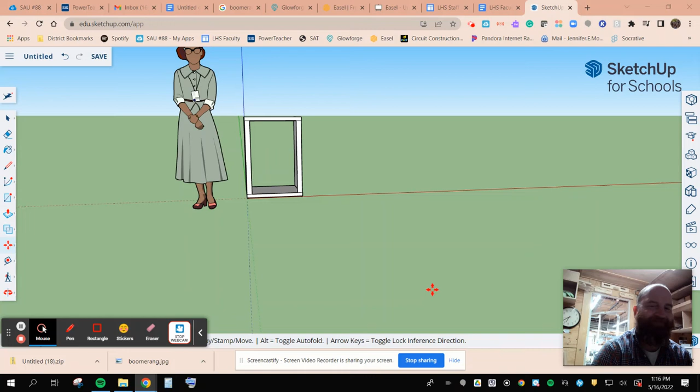What we're going to make today is just this really simple cabinet right here. But it's important that you know how cabinets are made, so we're going to learn how to do this in SketchUp.

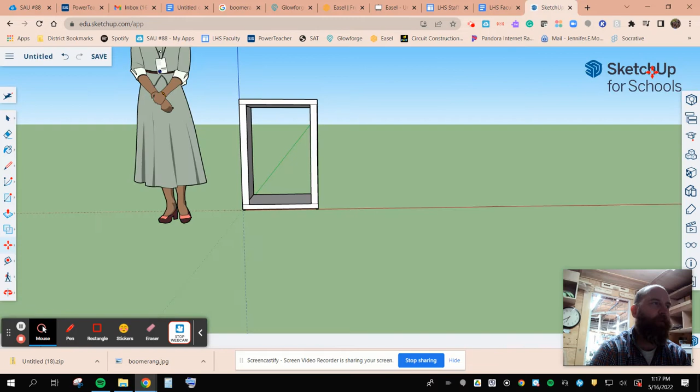I'm going to come out of here. I'll just go home. Can I just go home? I'm just going to go home. I'm going to click Don't Save because we're going to do it all together from the beginning.

So you know how to log on to SketchUp at this point. Once you're on SketchUp, we're going to go to Create New. Now, that cabinet looks really simple, but it is a little complicated, so try to keep up. It's all things that we have learned before.

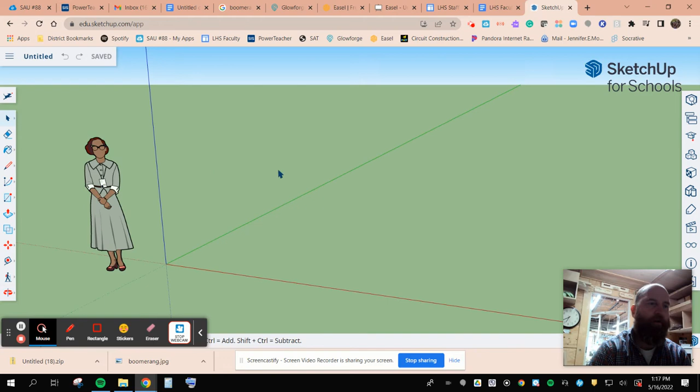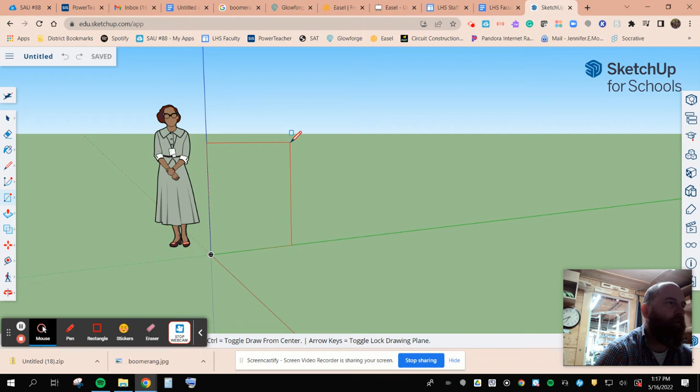Remember, use a mouse with the scroll wheel so that you can rotate around and flip around. First, I want to come in here and tilt it so I'm looking at the green line. I'm going to grab my rectangle, start here, and build a rectangle. You got to move it around so that I want a red rectangle, so it's upright. And I click it.

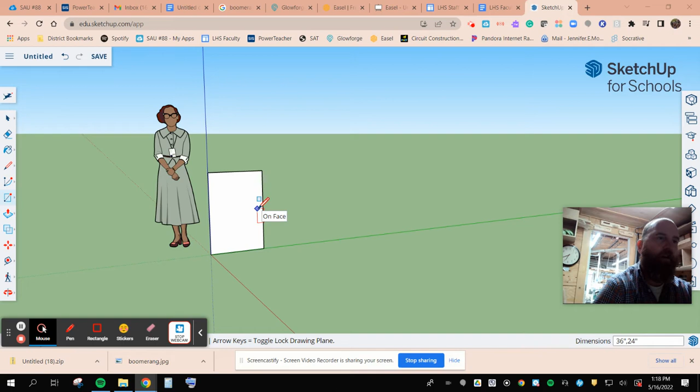Then once I click it, I'm going to type 36 inches, comma 24 inches, and then enter. And that will snap there. I'll move this up. That's where you're typing 36 inches, comma 24 inches. So that's the left wall of our cabinet. There's the left wall.

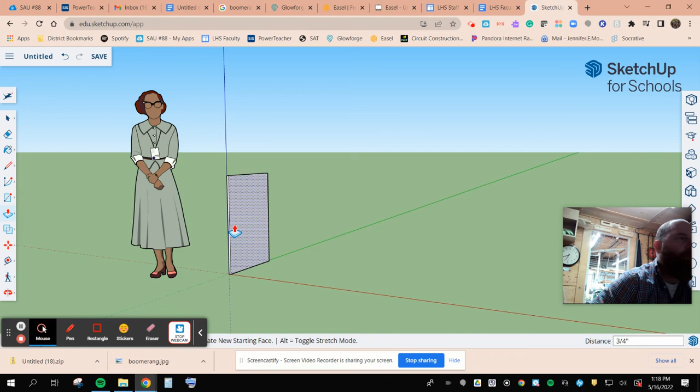Now we have to pull that out. We want to use 3/4 inch plywood, so we're going to click 0.75 inches, or you can type 3 divided by 4 inches. And now we have a piece of plywood that is 2 feet by 3 feet, 3/4 of an inch thick.

Now there's one or two new tricks I want to show you. One of them is a tape rule, this little measuring tape rule right here. What we can do with that is make little marks as reference points. So we're going to click here, come down this face, and click.

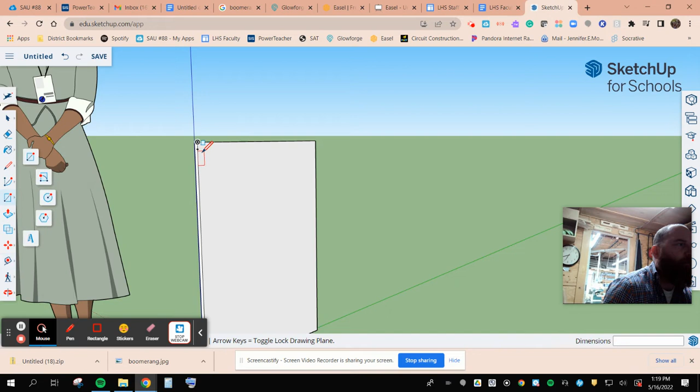But I only wanted to come down 1 inch, so I'm going to type in 1 inch, 1 quotation marks. And now I have a little tiny dot there, and it's called a guide point. When I come over to the rectangle tool, I can put it right on that dot, and now I know this rectangle is going to be 1 inch down from the top, which is exactly what I wanted.

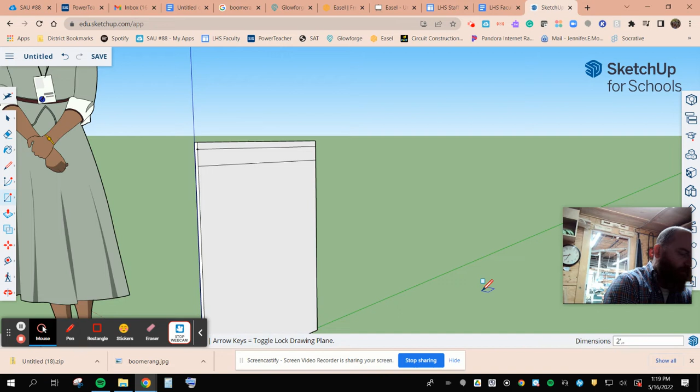So I pull that over all the way till it says on edge and I click. Now I don't want my rectangle to be quite so wide, so I'm going to change that. 2 feet long is correct, so I'll stay with that - 2 dash is 2 feet, or I could do 24 inches again. But I only want it to be 3/4 of an inch, so 0.75 or 3 divided by 4. And there you go, now we have that 3/4 of an inch.

Now the reason I wanted to put that there is because when we build cabinets, we put a dado in. If you remember what a dado is, it's when we saw that guy in. So I'm going to push that.

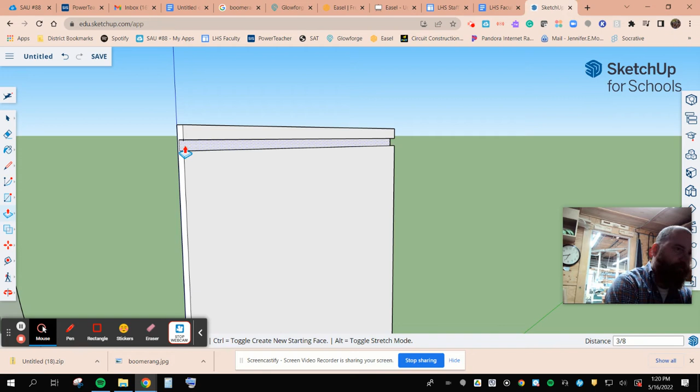I only wanted to do half of the plywood for a dado, and half of the plywood is 3/8, so I do 3 divided by 8, because if the full plywood is 3/4, half is 3/8. When I click enter, now you can see we have a perfect dado that goes halfway down the plywood, just like we wanted. So we want to repeat all that for the bottom. In case you missed some of that, I'll show you.

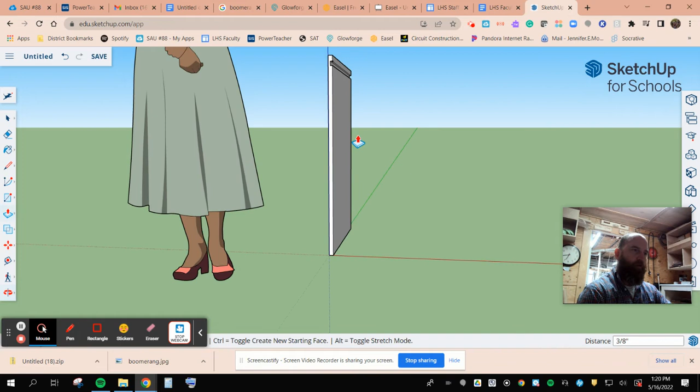Now I got to get down to the bottom of my board, so I'm going to click Shift and the scroll wheel. Remember that trick? It's going to move down, and now I can zoom in on the bottom a little bit.

Let's go over those steps one more time. I'm going to click my tape measure, start on this corner, and measure up 1 inch. So I'm going to type in 1 and some quotation marks, and now that little mark is 1 inch up.

I'm going to rotate around, grab my rectangle tool, start on that guide point I just made, click once—you don't hold the button down—and then on the edge, click again. And remember, I want that to be 2 feet, but now I want to change that. So I'm going to do 2, 1 dash is feet, comma, then 0.75 again. Bam, and that's the size of my dado.

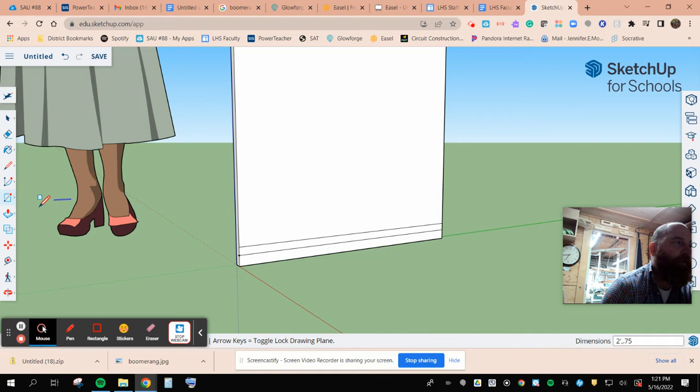So once again, I'm going to use my push-pull tool. Let's say that out loud, push-pull. I'm going to click on it and push it in, and I want it to go in 3/8. So I type in 3 divided by 8 and some quotations. And now that guy is a perfect dado, as you can see.

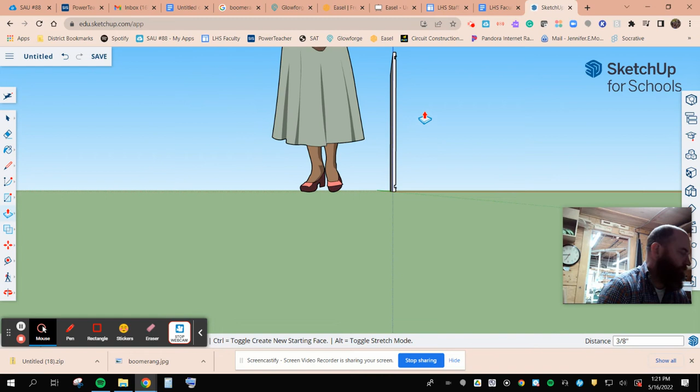So if we zoom out a little bit, zoom back in, maybe use our shift button to kind of adjust ourselves, you can see I got a dado at the top and a dado at the bottom. That's really cool, that's what we wanted. That's the left side of my cabinet.

Now I want the same thing on the right side of my cabinet. So in order to do that, I'm going to make this one giant object, because sometimes this guy gets confused and forgets that this is one board. It thinks of it as a bunch of different lines or something.

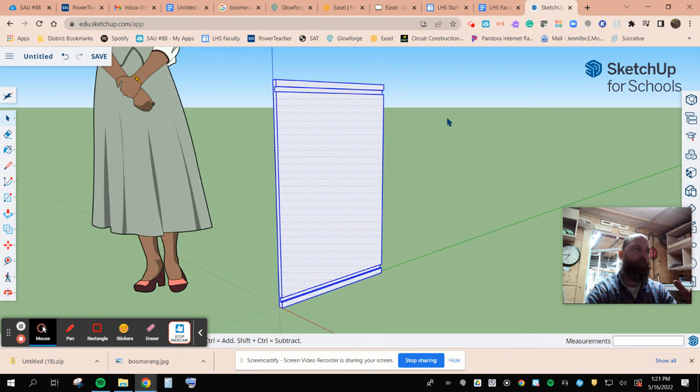So I'm going to select—I don't know if you caught what I just did there, but I went under this mouse and I selected everything in the picture, boom. And I'm going to right click and make that a component. You can just say okay, component number 1, you don't have to put any more detail. So now this knows that this is all one board.

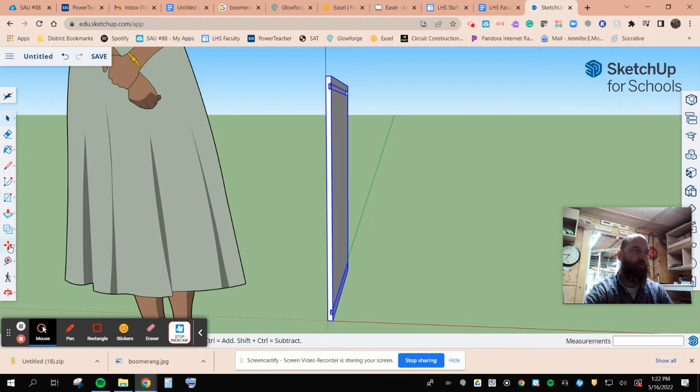So what I'm going to do now is copy this. If you remember how to copy, we're going to use this move tool right here. Click on that move tool, come over here, click control and click the button at the same time. Now you can let go of both and just slide this over and click enter. And I want it 2 feet away, so I can do 24 inches, or you can just do 2 and 1 dash. That's perfect.

I don't know if you noticed, but everything looks great here except one small detail—our dados are on the wrong side. So we got to flip this board.

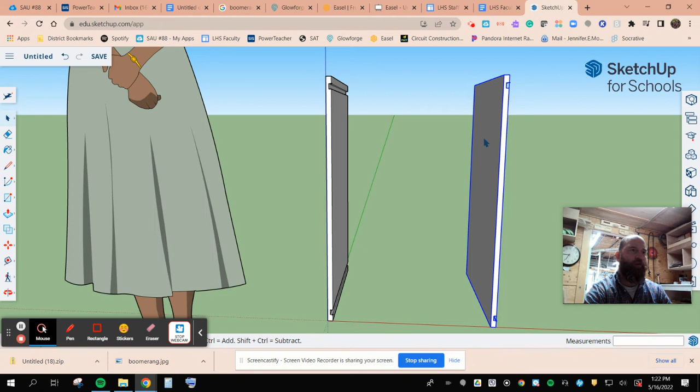So this is the other trick I wanted to show you. I want you to right click on this, and you come all the way down here and it says flip along. And we want to flip along the red. Boom. And when you flip it around the red, you'll see the dados now are inside facing each other.

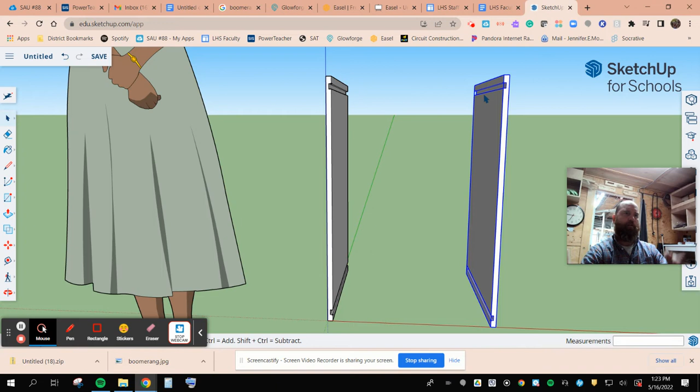So there's the beginning of our cabinet, that guy's looking really, really good. We have dados in the right spot. Now we're going to slide a piece of plywood into those dados.

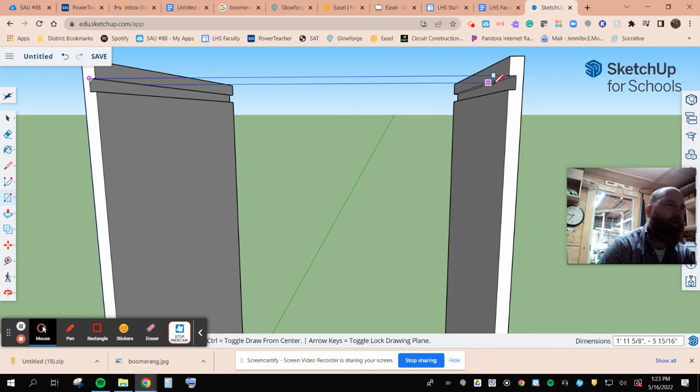So I'm going to zoom into those dados a little bit, and what I'm going to do is come over to my rectangle tool and click right on that corner, the end point. Then I'm going to slide it over here to that end point, and boom, there's the start of my plywood. Now I'll use my rotate tool.

We're going to rotate around. I'm going to zoom out a little bit. And this is why it's so important to use that mouse so that you can do all that.

I'm going to use my push-pull tool, and I'm going to grab this, and push it out, then put my mouse on the face there, and it says on the face, so it knows to pull that out. And there you go, that's how that guy's looking right there.

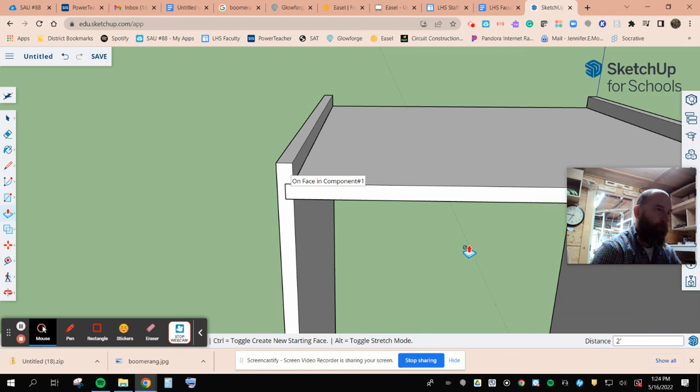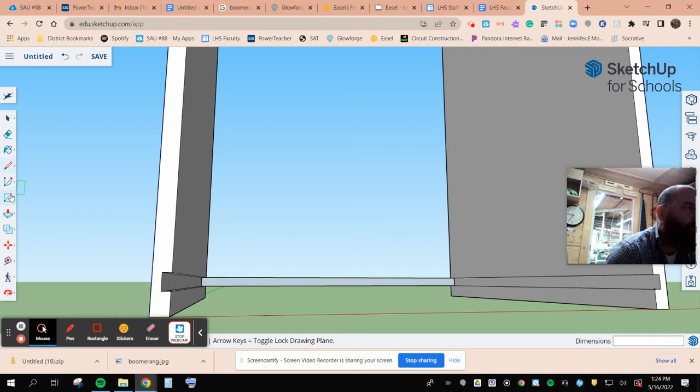So we're going to zoom out a little bit, and do the same thing down here. We'll zoom in down below. We're going to go to our rectangle tool, start in this guy, click, come over here, make our rectangle, click, rotate around, use our push-pull tool. We're going to take this guy and pull it.

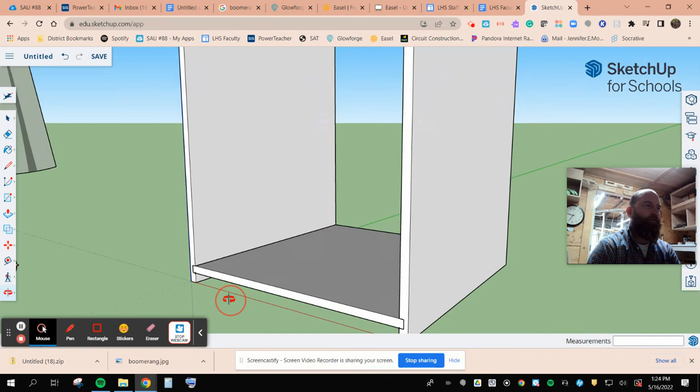Ooh, I did something wrong there. Oh geez, this is going to be more difficult than I thought. I'm maybe too close to the object. All right, let's try that again. Pull that out until you get on the face. There you go, so sometimes things just go a little wonky, so that's okay. All right, so there you go.

We have our beautiful cabinet, and it's got the two sides, the top and the bottom. That's a really good start.

Now there's one more thing that I want to do. So I'm going to make this one giant component again, just so that it knows that this is one object now. Make it a component. That's component number 2, so that guy's all one piece.

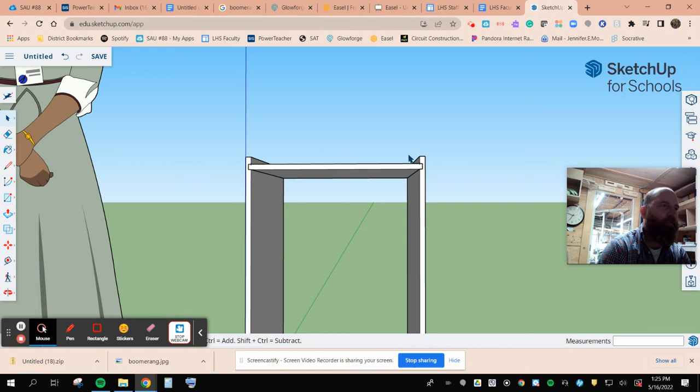So now I just want to build a face frame, which just means I'm going to cover up the plywood with some nicer wood. So I'm just going to use my rectangle tool and come over here. I'm going to start on this edge, drag it over here, and bring it all the way to, I'm going to zoom in apparently, to where it says on edge. Boop, and I just made a rectangle there.

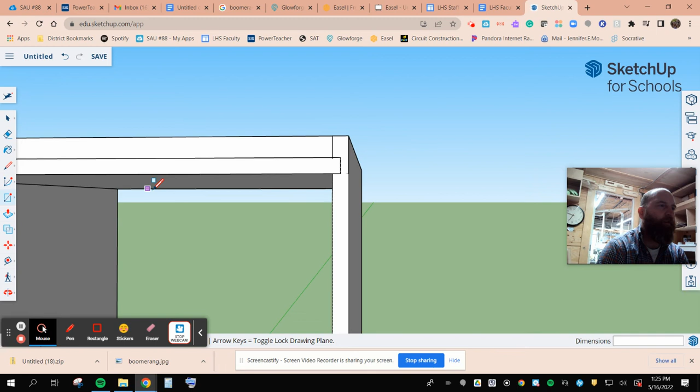So now that I've done that, shift and move it over a little bit. I'm going to use my push-pull tool and pull that rectangle out. I want it to be 3/4, so I do 3 divided by 4, and then inches. Now it's 3/4 of an inch thick. I just pulled that board out 3/4 of an inch.

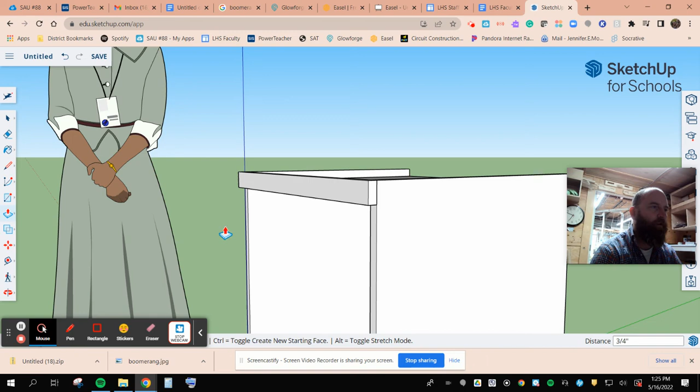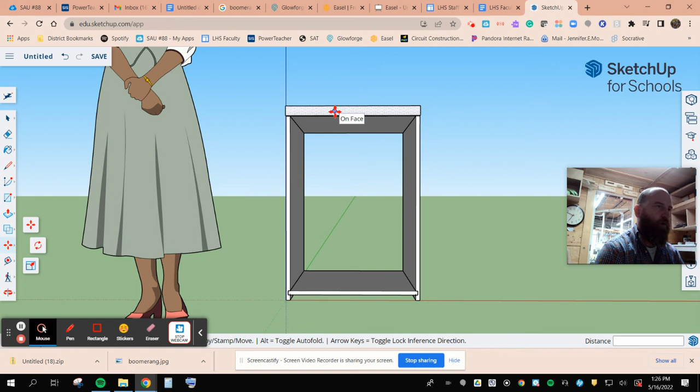I want that same board down here at the bottom. So I'm going to click the move tool, come over there, and remember, I'm going to hit Control and click it once. Then I can let go of both things and drag this way down to the bottom where it belongs. And that's looking pretty good now. I got a little bit on top, a little bit on bottom.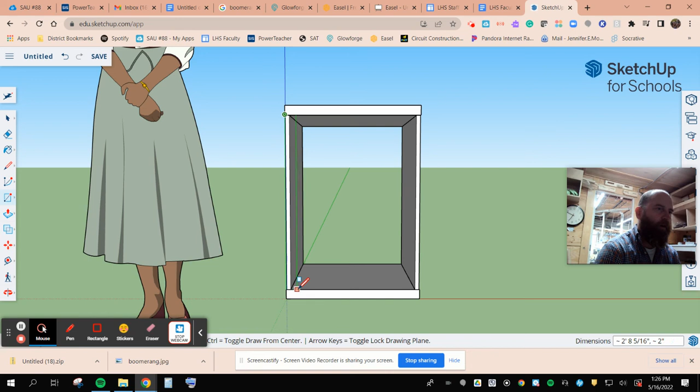The last little thing I want to do is make two rectangles to connect everything up. So I do endpoint, I bring this down, and this one I'm just going to eyeball to where it says 2 inches on the bottom of the screen. There's that guy. I'm going to grab my move tool, copy that guy, hit control, click on the move, and move that right over to where I want it there. And now you can see

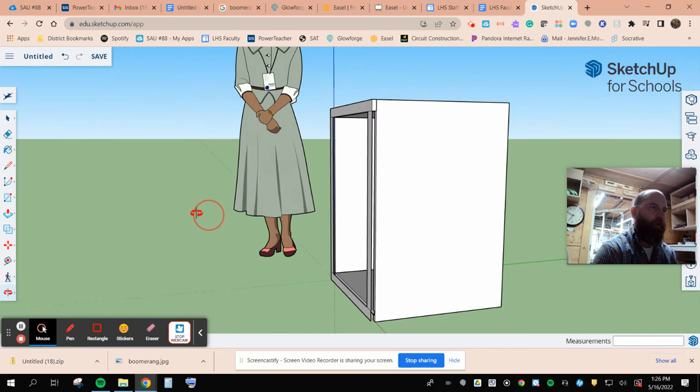I have my face frame. I forgot to make my face frame a little bit thick, but that's okay. Not a bad start, so that is your cabinet. Hopefully you're able to do a cabinet as well.

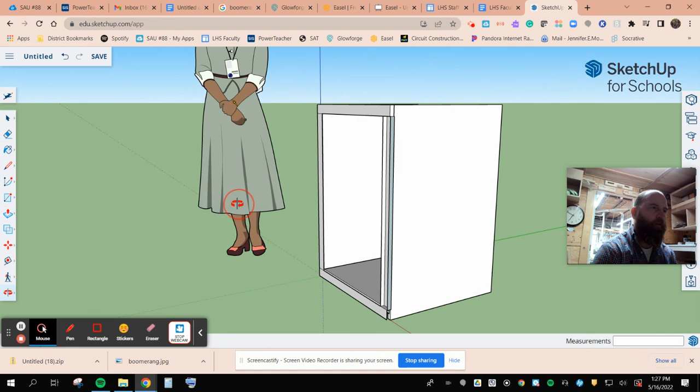I think we should try to push that in a little bit. I'm going to push these in just because that's going to bother me. Otherwise, I'll push those to the cabinet. And I'll push these into the cabinet too. And there we go, all right, that is your face frame project.